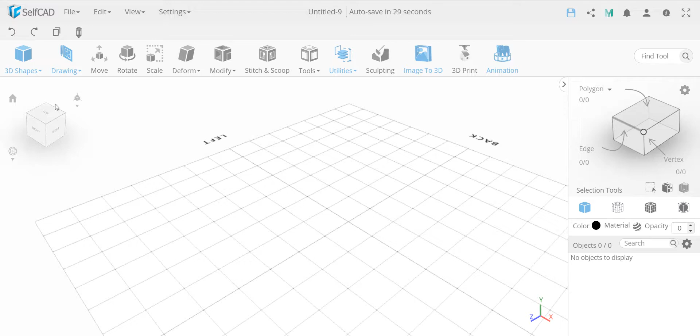Hi guys, in this video I'm going to show the difference between MagicFix and MagicBlock. So let's get started. I'm taking a simple cube, let's just position it onto the center. Now I'm going to create a second cube.

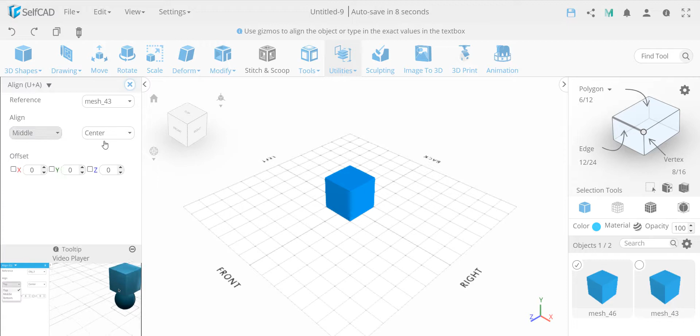I've already sized this to be half the size of the previous, and just to make it look nice, I'm going to position it in the center of the first bigger cube. So just aligning it to the center. Okay. Now if you look into the wireframe mode, you'll see we have basically two cubes. This is perfectly positioned inside one another and everything looks okay.

Now what I'm going to do is merge them into one object. Going to utilities and I'm going to use merge objects. So now this becomes one object, because you can only use MagicFix or MagicBlocks on a single object. But I'm not done yet. I'm going to actually add some details to this.

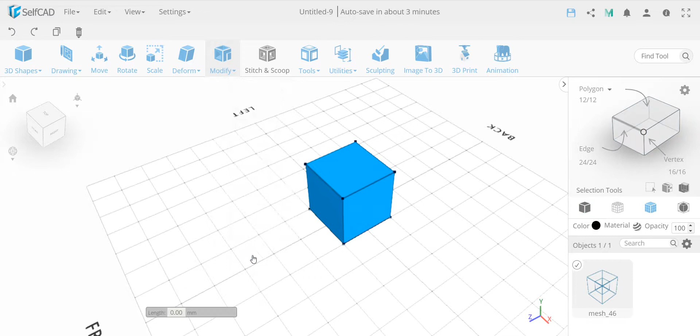I'm going to go to the add details tool, and I can basically drag a line over here and split this way, or I can add a vertex. So let's just undo this, add a vertex just for illustration purposes, and add a vertex over here. Okay, and I'm going to confirm it.

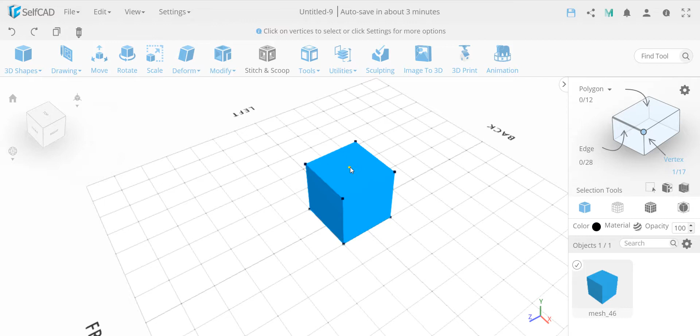Now I'm going to go to the vertex mode, select the vertex I've just added, and go to the move tool, and I know the size of this is 100. So I want to make it nicely proportional, a nice slope. So I'm going to add 150, and we get this nice slope over here. So far so good. If we look at the wireframe mode, everything looks perfectly fine. We just added this nice slope.

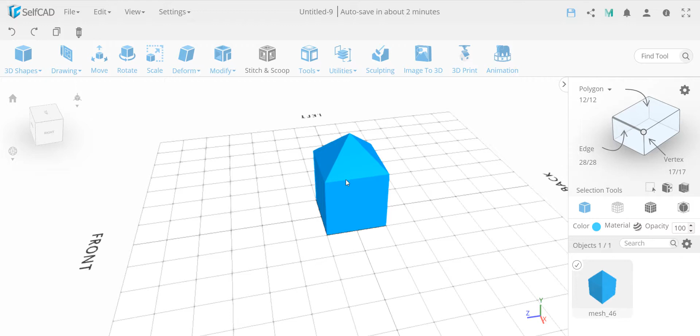Now, this is actually a problem we see over here, because if you're going to slice this, this is a volume, and then you have another volume inside. So you may have infill, whether you choose infill or not, but if you have a volume inside, this will kind of interrupt the infill. It's printing something differently. SelfCAD slicer wouldn't have an issue with that, but some others may.

The other use case is very complex objects where you do a lot of transformations, sculpting, and so on, and you may end up breaking the object, self-intersecting, which means, for example, this pushes in and comes out from the other side, or you may have small holes, or a lot of other issues classified as non-manifold issues. So this is where MagicFix comes in.

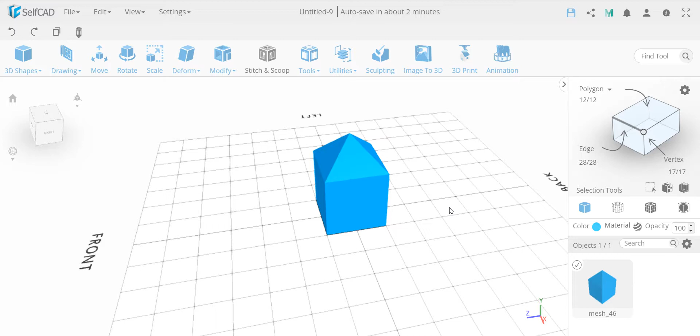But MagicFix and MagicBlocks are actually very similar, and they have some settings, and this is what I'm going to show you now. And you'll see why I used this particular shape to show it. So if I go to MagicFix first, there's an option we have, sharp. This means that we want to keep the sharp edges. So let's preview this, and this actually looks okay.

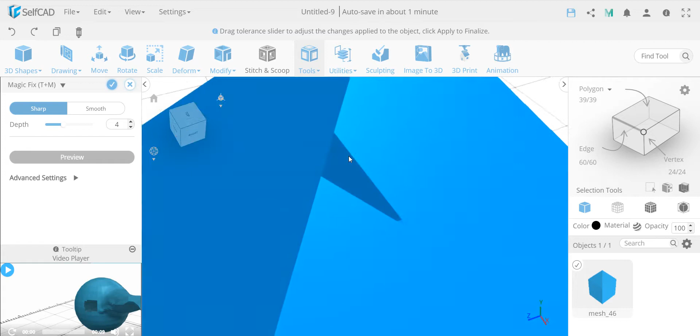Over here, it looks like it created a small dent, a small hole, which is actually quite interesting. So let me add a little more sharpness. Because the way this works is with voxels. If you see over here, we have rectangles. Think of very small cubes, kind of like Legos, and it marches through them, one entire layer, second layer, and based on this it connects.

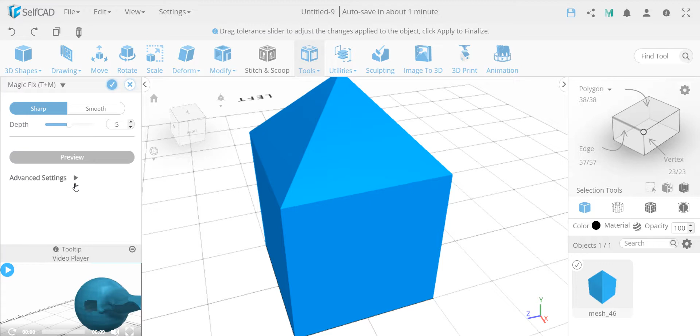If it ends up having a box in between very small boxes, this wouldn't actually work. This may create an issue unless we add more details or remove disconnected, and you'll see in a minute. Let me first finalize this and show you something. So this rebuilt the object, but it didn't really solve the issue that we have. The box is still inside.

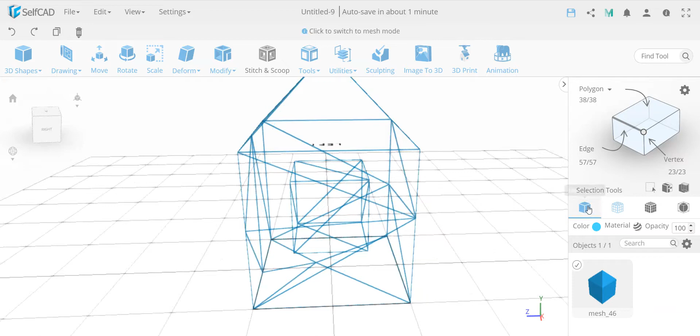And the reason is because, in this particular case, it's still printable. It's not like you have to remove it. But if you decide you don't want that, there's an option here in advanced settings where you can remove disconnected. If you choose remove disconnected, let's take the same settings we did over here. And in this case, you actually see the inside box has been removed. All of these small boxes created these triangles, so it's hard to see.

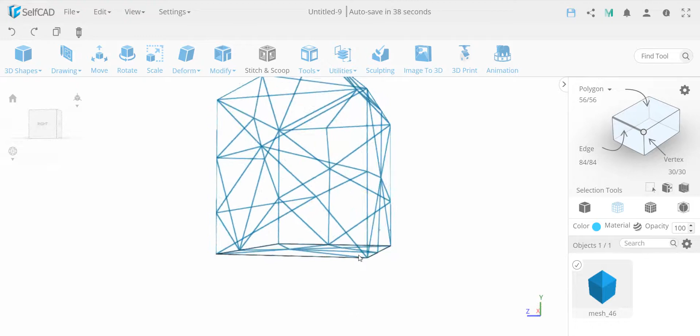Let's go resolution 0. I'm going to reduce it to 0, and as you can see, we are back to the basic cube I started with, which is basically just 9 polygons, the minimum that you can do with something like this. So this is basically what MagicFix is doing on sharp edges.

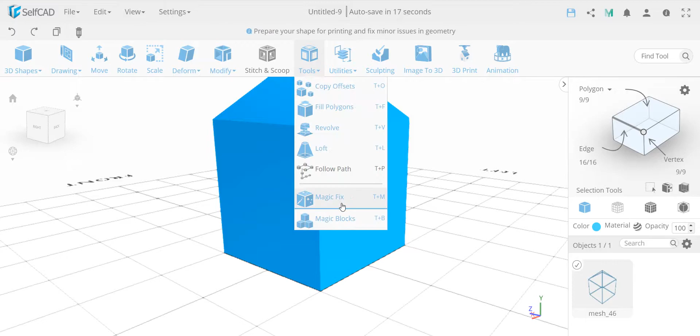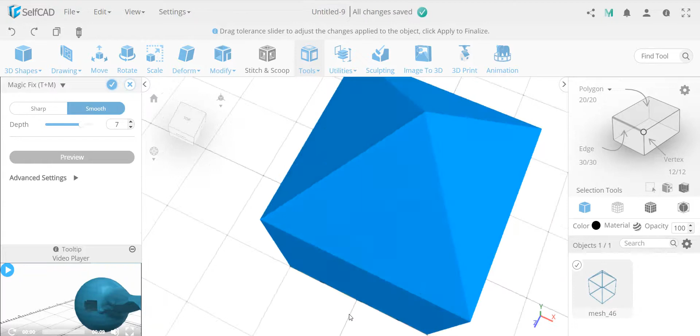If you're going to go smooth, this is what the default remesh would be in most applications. It will do the same idea, but I would need a much higher resolution because this kind of tries to smooth between corners, and this breaks it. I need to increase it, let's say, to 7 - it will take more time. In this case this will work, but if you have more complex objects, you may have certain cases where this will actually be broken.

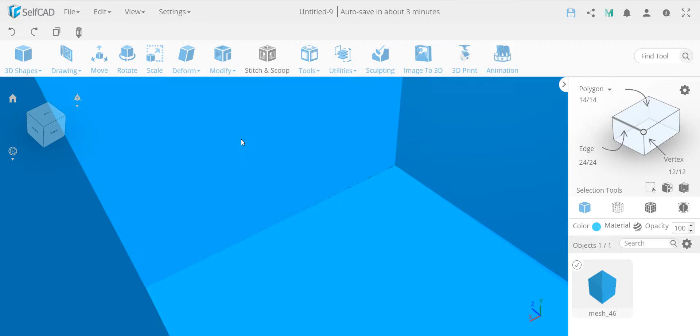So let's see now if I'm doing smooth, I have 20 polygons. I bet if I do resolution 0, this probably wouldn't be able to go back to 9. You see, it went back to 14. The reason is because it's hard to see since it's so smooth, but there is actually a lot of small details that has been added in certain places that you cannot undo. So this is basically the difference between sharp and smooth.

Now, if you go to MagicBlocks, it's the same techniques. You have the depth, it's still the size of the boxes, and you still have remove disconnected, so you can remove the inside, like in this case. You have scale - let's even reduce it. That's another way of applying a certain sensitivity to how big the thing should be.

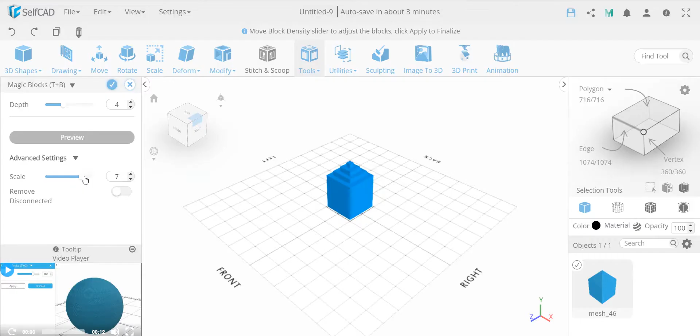And they have the same setting, by the way, in MagicFix. But now over here, this will not smooth the relationship. So you see there's no setting between sharp and smooth, because the entire sharp and smooth thing happens when you create voxels. That's actually how this algorithm works.

It creates voxels, and in MagicFix, it will create a connection between this and this one. When it's sharp, it will try to make a sharp connection, which it did very nicely, as you saw in the previous example. When it's smooth, it will kind of make a rounded, smooth connection between them. In this case, it could be just a chamfered kind of edge or something like that.

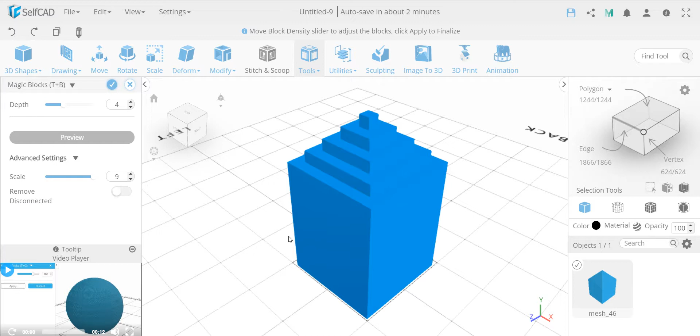But if I'm going to reduce it this way, because the voxel size is very big... if you go more, let's say like 7, it takes a little more time, but look how nice this is - it creates something like this. Over here, it didn't create anything because these voxels actually line up one on top of the other, so there's no offset. So the only difference shows up when you have some smooth edges.

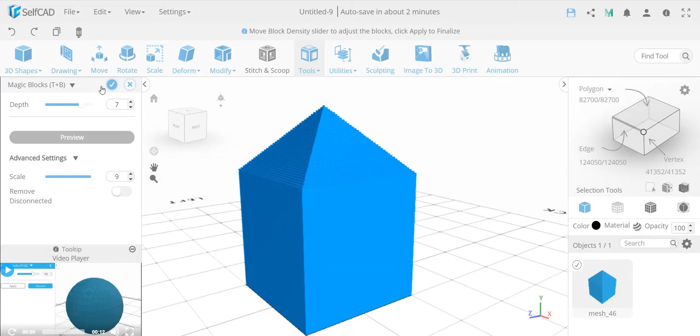And if I'm going to finalize this, look how many faces we got - 82,000. I can still do resolution 0 and bring it down by a lot. This will bring it down to 196 from 82,000. That's really significant, but you still keep this over here.

So in short, MagicFix is made to fix objects. MagicBlocks is made to give you a different design structure. You can take anything with angles and make them into voxels and blocks. That's basically what it is.

In most cases, you would want to use MagicFix with remove disconnected. The reason we don't always have remove disconnected on is sometimes you have very complex objects, and if you remove disconnected, it will destroy it. You may be better off leaving them and patching it yourself, merging it and working on it a few times to make sure the object gets fully printable, but remove disconnected will just destroy it. So we have that option.

Just a side note, when you go to sculpting, you also have something called remesh, which is very similar, but over there it will always remove the disconnected automatically. It's the same tactic, just an older algorithm that we used, with less flexibility. Maybe eventually we'll replace the remesh in sculpting as well, but for now that still has the old functionality.

And this is rebuilt - the most thing that we've recently rebuilt with MagicFix is to keep sharp, because if you want to rebuild objects, you want to actually keep it sharp. I mean, the sharp edges, that's something really important.